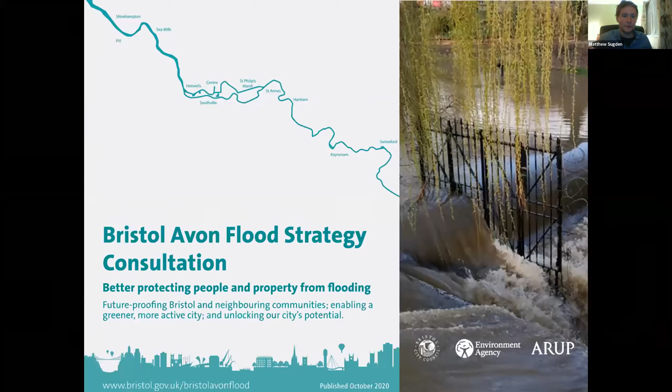Thank you. Thanks, Richard. Evening all. My name's Matt Sugden. I'm a flood risk engineer at Bristol City Council. I've been working on this for a number of years now, and the flood strategy is now out to consultation. So really big milestone for the project, and great to be here talking about it now. So 3 speakers, as Richard was just saying. I'm going to give a bit of an overview from Bristol City Council's perspective, and then Dan's going to give a bit more detail around the modelling that was done. And Hen will talk about some of the challenges and the preparation of the strategic outline case.

So let's start at the beginning. Why do we need a flood strategy in the first place? Well, the flood mechanisms in Bristol are fairly complex. It lies right at the bottom of a very large river catchment. The River Avon catchment kind of goes all the way up to the north to the Cotswolds and down in the south from the Mendips, and brings with it all of that flow from rainwater falling on South Glos, BANES, even parts of Wiltshire and Gloucestershire.

And it arrives slap bang in the middle of Bristol city centre and is met with the tide coming up the River Severn. So as I'm sure a lot of you are aware, the Severn Estuary has the second largest tidal range in the world, and that comes up the River Severn and into central Bristol via the River Avon and meets in the middle with the flows coming down from upstream.

So add to the mix as well, we've got a floating harbour in the middle of Bristol, an early 19th century water body that was constructed to facilitate a constant water body to mitigate the effects of the rising tide on the boats that were moored in central Bristol, and that just adds an extra layer of complexity.

So it's complex, but you know, flooding is not something that could happen. It does happen in Bristol. Most years, when we get particularly high spring tides, we expect to get minor tidal flooding in and around low spots of the Avon. In the last decade, we've had over 20 tidal floods that we have recorded, and perhaps somewhat concerningly, the highest was this year, in fact.

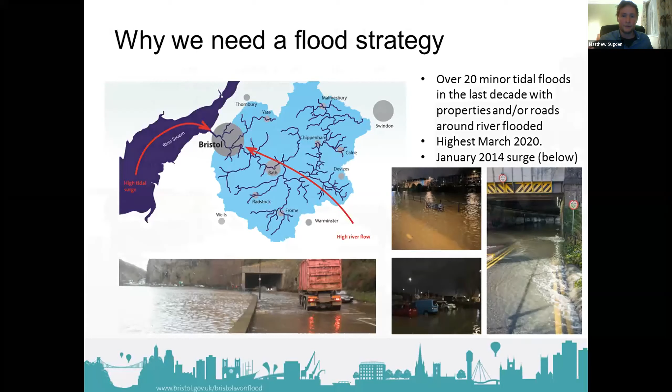So yeah, flood mechanisms are complex, and we haven't had a severe flood, but we could. But as well as that, we've got quite historic and piecemeal infrastructure. You can see there are low spots along the banks of the River Avon in the image on the right. We get regular overtopping in various locations,

but as well, our flood risk infrastructure that we do have is aging. So the floodgates on the left there are our principal flood defence gates that protect our floating harbour from the tide that comes up the River Avon. But you can see quite clearly that they're outflanked, and the kind of silvery objects that you can see on either side of the gate, they're the control mechanisms. So obviously the mechanisms themselves are quite vulnerable to rising sea levels.

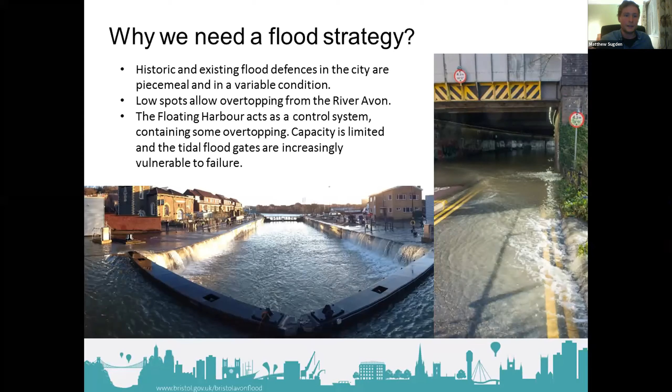So a few facts and figures. Well, in the current climate and with the flood defence infrastructure that we operate and maintain in the current day, around about 1,100 properties are at risk of flooding should we have a severe tidal event or severe fluvial event in the city centre, and a further 200 properties in communities upstream and downstream. And of course, sea level rise and climate change is doing nothing to make that any better.

And if we were not to take any action other than maintain what we've got already, then by the end of the century, we can expect to see about 4,500 existing properties at risk. And that last bullet point on the screen there is really quite striking to me. So a flood event that has a 0.5% probability of happening in any given year in the current climate could become as frequent as a 63% annual probability by the end of the century.

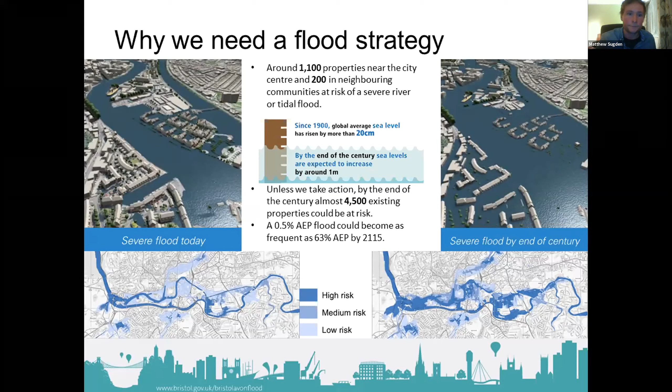So the kind of event that you see on the bottom left image there, where large areas of central Bristol would be flooded, that could be as common as a 63% annual probability event by the end of the century. So obviously a lot of strong evidence there to point us down the need for a flood strategy.

So a bit of background as to how we got to where we are now. This spans my entire career at the council. In fact, when I joined in 2009, we quickly went into a piece of work in 2010, scoping out a piece of work called the Central Area Flood Risk Assessment. And that was really the first time this sort of joint probability of fluvial flows coming down the system coinciding with tidal surges up the system and what impact that would have in central Bristol was assessed.

Some of you might be wondering, well, hang on, River Avon, main river, why is the Environment Agency not leading on this? And the Environment Agency are a really key partner, and they are a joint promoter of the scheme. You'll notice that the branding is on the consultation, and everything's been done in coordination with the agency as a scheme promoter, and they sit on our board. But for various reasons, it makes a lot of sense for Bristol to be leading, not least because of the impact on opportunity for the city in terms of development opportunities.

One of the strategy objectives when they were first set all the way back in 2015-16 was around supporting sustainable development in the city, and that's become even more important in the present day. Here we are in 2020.

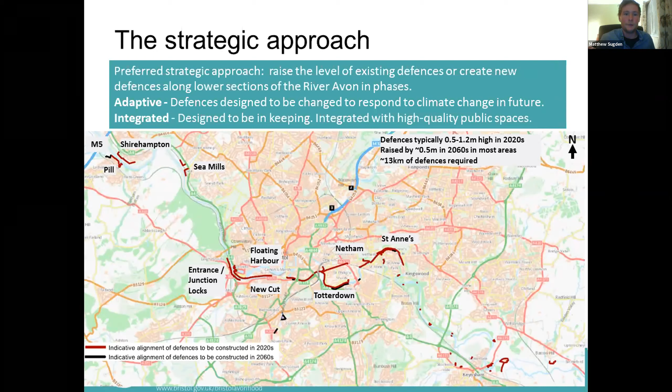So then, having arrived at this preferred strategic approach of raised defences, it was kind of like, well, what's our vision for what that looks like for Bristol? What does it mean for Bristol? And the vision there is really all about making sure that we design measures that work for Bristol year round. So we are at a strategic outline case stage at the moment. No designs have been developed. All of the illustrations you'll see in the consultation and the strategic case itself are concepts, not designs.

So it's not just flood resilience, it's flood resilience at the centre, incorporating opportunities for new green spaces and improved landscape. It's about improving biodiversity and opportunities for flora and fauna along the River Avon corridor. Movement is a really big one for us. Those that know Bristol will know it's a very hilly city. So having this east-west link through the city to provide a flat walking or cycling link to get to various places is a great thing for us.

And then it's also about making sure that we take the opportunity to enhance and protect our existing heritage and culture. Bristol's got a rich engineering history, and it's also got very sensitive areas. Underfall Yard, being the area where the predominant control mechanisms for our floating harbour are located, is a scheduled ancient monument, so there is no higher designation. So when we're designing new infrastructure around these places, obviously it needs to be very sensitive to the heritage and culture that we have in the city.

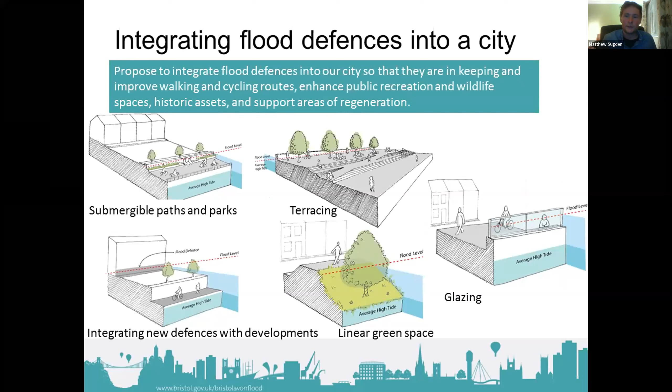So those illustrations brought to life again, the top left there, a lot of you might recognise that's Bath, the same river, different problem. So largely they have a conveyance problem, whereas our problem in central Bristol is more driven by the tide. But again, it's just showing an example of how flood defence infrastructure doesn't need to just provide that one function. It can incorporate landscape and biodiversity improvements. It can incorporate landscape walking links and parks, and just give people the opportunity 99 days out of 100 to be able to get down to the river and enjoy it, but still have that infrastructure in place that protects behind when you do need it.

And again, other side of the river on the bottom left in Bath, again, an example of how flood defence has been integrated into the fabric of a refurbished building. Terracing example is the South Bank in London. Obviously, I'm not suggesting that we're going to create a new South Bank for Bristol, but it's just an example of where this technique of terracing has been used to create a great destination. And then other examples there, across the Atlantic in the States, Delaware, I think that example's from, where they've just incorporated a linear green space along the corridor.

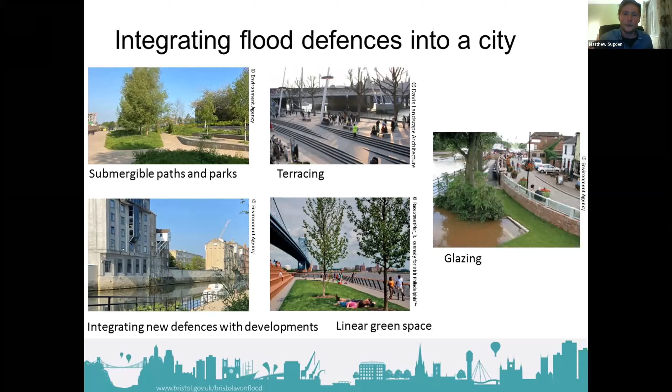And one other potential solution that I personally don't favour, but it is a feasible option for managing flood risk, is incorporating a low-level defence in the short term, and then doing it in such a way that you can adapt over time and incorporate glass panels or glazing if you need to at a future point in time. So I'm sure lots of people will be interested, and certainly in all of the engagement and stakeholder sessions that we've done so far, lots of people have been interested in the other options that we're not proposing as part of our strategic approach.

I won't go through an exhaustive list, but basically, a lot of you will be familiar with the flood and coastal erosion risk management appraisal process. But essentially what we did was identify flood defence techniques that would be feasible in terms of practically effective in terms of reducing flood risk to Bristol, identified them, and then combined all of those in logical sequences to create a long list of strategic approaches. That long list was 39 combinations of measures. That was then tested to reduce to a short list of 7, which was then assessed against various economic appraisal processes, as well as assessing against our strategic objectives to arrive at the strategic approach that I've just outlined. But 2 things I'll just mention: tidal barrier and slowing the flow upstream.

So real big interest at the moment around natural flood management, I've found, just by talking to people in the city, and from reading the national media. It seems to be getting a lot more coverage at the moment. But of course, in terms of the tidal problem to central Bristol, land management practices and storing floodwater upstream is not going to do anything to manage that tidal flood risk.

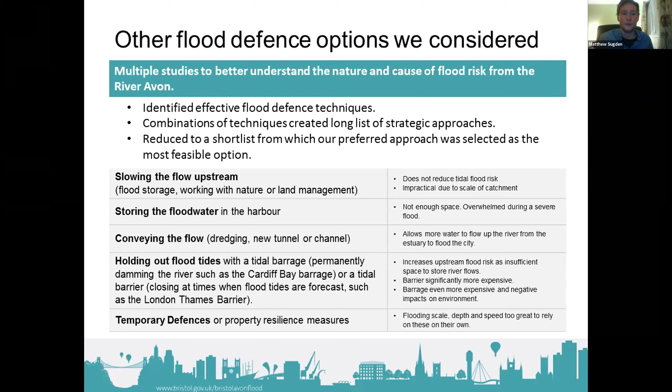So what happens is you can raise the tidal barrier to keep the tide out, and that's fine. But what happens for the period of the barrier being raised is you get so much water coming down the system that it actually fills the channel up and overtops, and you end up in a situation where you have to have raised defences along the banks of the river in combination with the barrier anyway. So it just doesn't quite work for Bristol.

Next steps then, and this is the last slide, it's just to say really that these proposals are at a very early stage. We've developed this strategy in the form of a strategic outline case. We've submitted that strategic outline case now to the Environment Agency in their role as regulator of the DEFRA Flood Defence Grant in Aid pot. And we're going through that technical assurance process in parallel to the consultation that is live right now.

But that, we hope, will get us to a point in time where the council's administration can make a decision on adopting this preferred approach that we have, and then quickly move into outline business case phase early next year in 2021, come summertime, and that will work through probably in a couple of business cases going together in parallel, and to be informed by further public engagement. Obviously we'll have to then get into detailed design work, gather our various consents, and hopefully get us to a point in time where the first phase of construction might begin on the ground around about 2025.

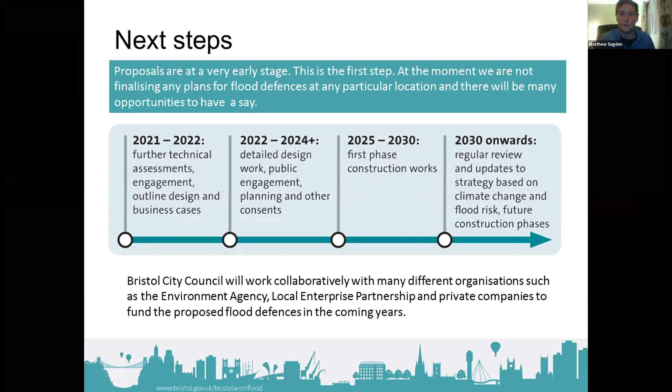All being well, this could be delivered by the end of this decade, but of course it doesn't stop there. It'll be regular reviews, examining what we've done, applying our emerging knowledge around climate change and all the rest of it to inform certain trigger points as we move forward into the latter part of the century.

So thanks ever so much for listening. Like I said, the consultation is out now. I really do encourage you to put in your response either as an individual or as representing an organisation. This is the first chance, I suppose, we've really had to put this out to technical specialists. We're getting a lot of interest from stakeholder groups and residents and businesses, but we'd really value your technical expertise in terms of criticising the work that's gone into this to get to a point where we've been able to put this out to consultation.

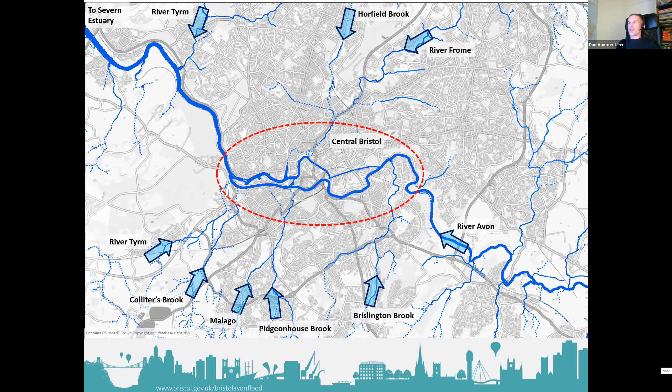So if we zoom in a little bit more, you'll see that not only do we have the River Avon, but we also have the floating harbour. The floating harbour is effectively a water control system. This was the original course of the Avon, and about 200 years ago, the floating harbour was constructed to provide safe mooring for trade vessels. Today, it's mainly used for recreation and navigation.

So the floating harbour is effectively sealed off from the tide, and the Avon was diverted along what is known as the New Cut to the south of the harbour, and that remains tidal. So during normal flow conditions, the water level in the floating harbour is maintained at a fairly constant level, and this can be regulated using the Underfall Yard sluices. They can discharge excess flows from the harbour when necessary during low tide.

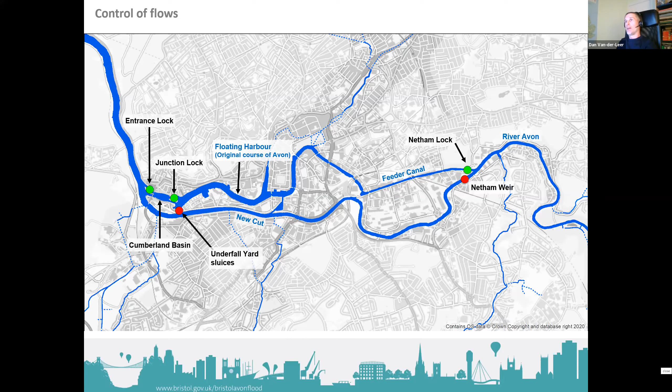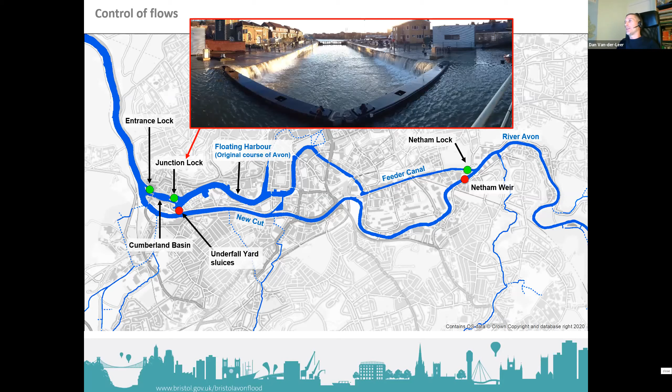So the system operates by Netham Weir maintaining a sufficiently high water level to enable navigation from the upstream reaches of the river into the floating harbour via the feeder canal. During flood conditions, the lock gates at either end of the system can be closed to effectively try to seal off the floating harbour system from the impacts of flooding. However, as we've seen earlier this year in March, the lock gates and the area around them isn't high enough to prevent those very high tide levels from getting into the floating harbour and causing flood risk.

So why do we need a model? Well, we can look back at past flood events and learn from them, but they can't give us all the answers. They can't tell us what might happen in the future. Models are needed to understand flooding mechanisms, flood depths, and also to be able to provide the evidence to justify any actions that we take to manage the flood risk, such as which options we select, how big do they need to be built, and where.

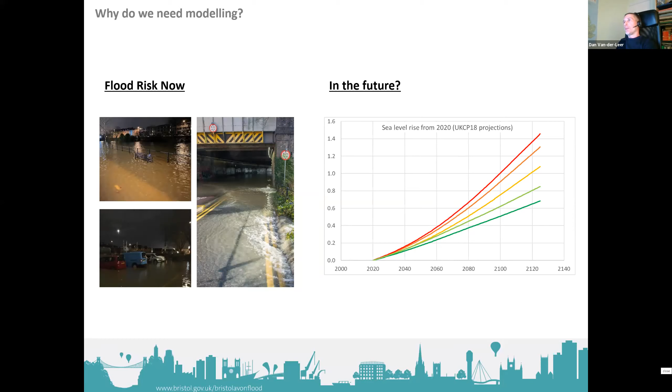So we've established the need for a model. So a model can be thought of as a virtual representation of a system. In this case, it's the river system. So for the strategy, the model has been constructed all the way from the Severn Estuary, from Avonmouth, all the way into Bristol. So that's the representation of the influence of the tide all the way into Bristol. And it also extends upstream past Keynsham. And this is to be able to represent those areas at flood risk from very high river flows.

The river channels within the model are represented using cross sections, and the data for these cross sections comes from topographic survey. For the areas upstream and downstream of Bristol, those cross sections have been extended across the floodplain to represent the floodplain. However, within Bristol itself, a more accurate approach has been taken, which is to use a 2D floodplain model, which I will talk about in a minute. So the 2D floodplain model is dynamically linked to the river system so that the interaction is represented.

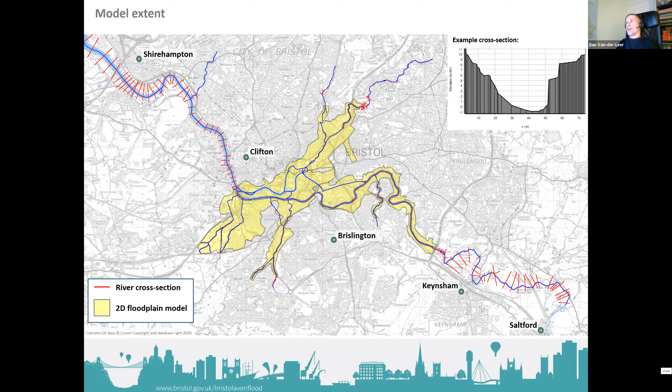So the river model not only includes the open channels, but also all the culverts associated with the river system. For example, the stormwater interceptor sewer, which runs to the north of Bristol city centre, is included, and that can take excess flows from the River Frome system and discharge them into the Avon downstream of Bristol.

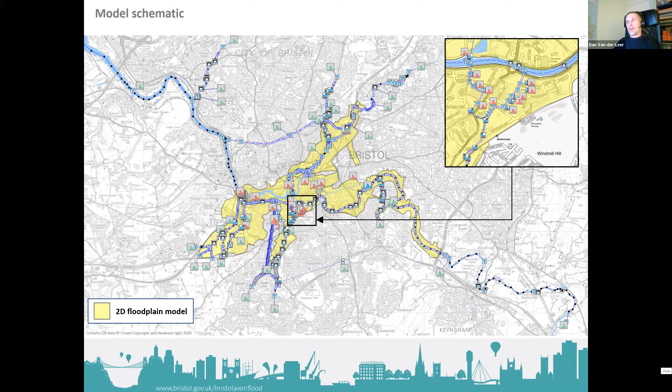In addition to the LiDAR data, the model also includes bathymetric data for the floating harbour and additional layers to improve the accuracy of the model, including the riverbanks, which are all based on topographic survey data. So that's the geometry of the model.

What we also need is to know how much water is coming into the model. The river system hydrological analysis has been undertaken based on gauge data, and this considers the whole catchment that drains into the Avon. For the Bristol strategy model, there's 30 individual inflows representing that within the model. Not only are the peak inflows calculated, but we also use real-world gauge data of past flood events to come up with a representative hydrograph shape for the biggest inflows coming into the model.

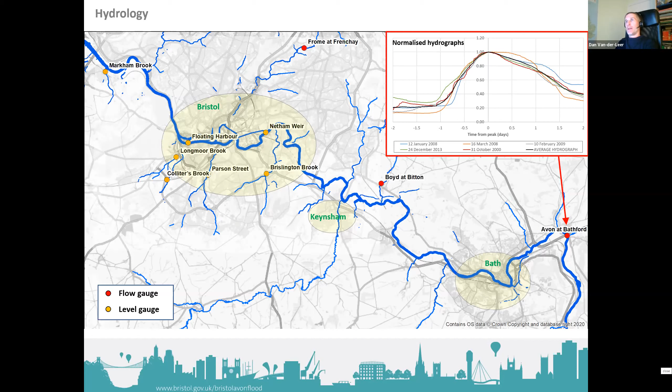So a model is all very well and good, but we need to have some confidence in it before we can use it in earnest to make decisions. For the Bristol Avon strategy, the model has undergone a calibration and validation exercise, and this is where we put real-world flood events through the model based on things like rain gauge data, and then we compare the model's predictions against the observations, including gauged water levels from river gauges, as well as flood outlines.

And this has been done for a range of tidal floods and fluvial floods. And the results have demonstrated that by calibrating the model and validating it, we have an acceptable level of accuracy that can be used in the strategy. So once we have a calibrated model, we can start using it.

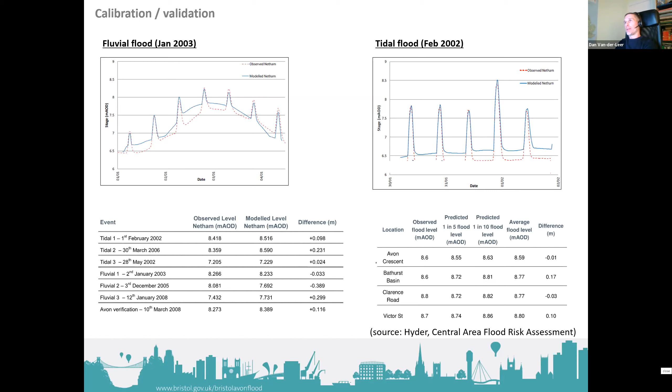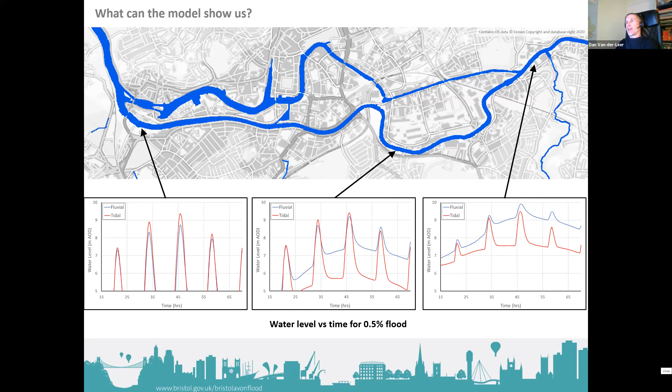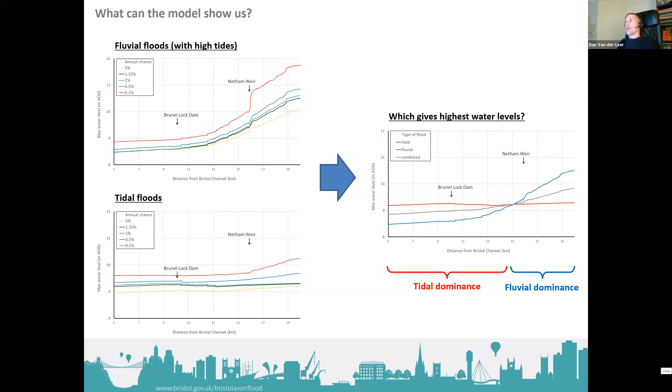So the graph on the right is demonstrating there's a kind of switch point between tidal and fluvial around Netham Weir or just before it. So as well as looking at results in the river, we can also look to see what's happening on the floodplain when the river overtops.

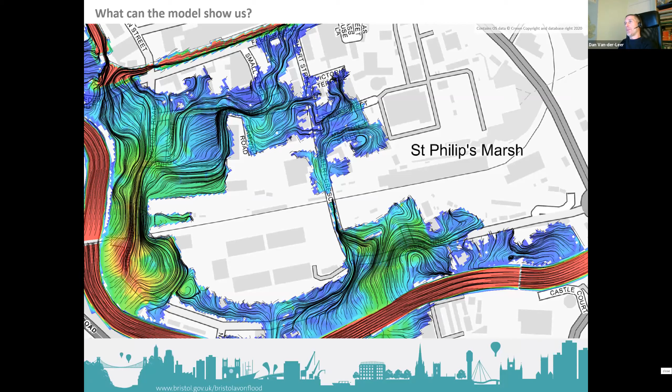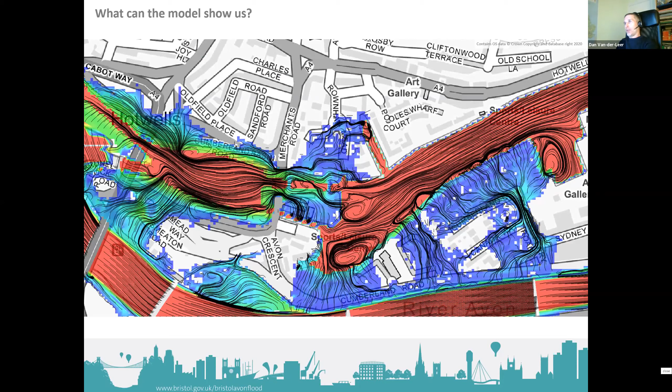And lastly, I'm just going to end on a slide showing one of the applications of modelling within the strategy. So as Matthew has already mentioned, the preferred option is for raised flood defences along the River Avon. There's obviously been a lot of modelling work to get to that point. However, there's still a little bit of modelling work we had to do.

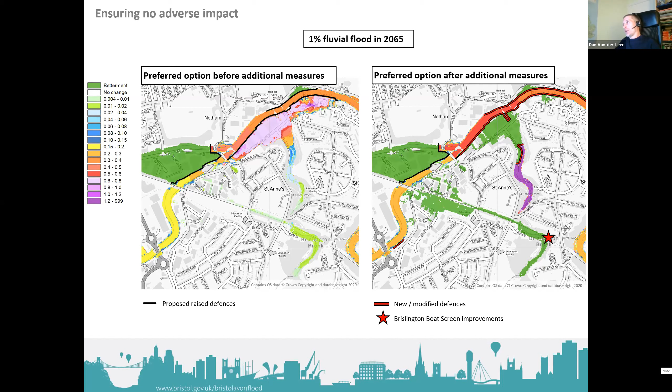Right, so I'll just share my screen. One second. I suggest if you're all stiff and need a bit of a stretch, it's a good moment while I do the swap over. Okay, hopefully sharing the screen, and now we're into the slideshow. So I'm hoping everyone can see the screens.

Thanks, Dan. I'm going to talk a bit more about some of the work that went into the Bristol Avon flood strategy. We, Arup, were brought on board to update the document and bring together all that wealth of knowledge developed by many partner organisations along the way, to update the modelling as Dan's taken you through, and to enable the integration of the flood defences with the strategic objectives. And I'm going to go into that a bit more, and evaluate the costs and benefits of different flood protection levels and standards of protection. And we also included an EIA pre-scoping report.

A key lesson learned along the way for producing this document is that the Environment Agency's approach needs adapting to allow for the complexities and the nuances of a complex city like Bristol and the surrounding region. And it's been a real aspiration of our collective team, consisting of Bristol City Council, the EA and ourselves, to try and work through the grey areas and enable them to be both understood and allowed for within the strategy. And the involvement of BCC and their stakeholders has been a really key part of that process.

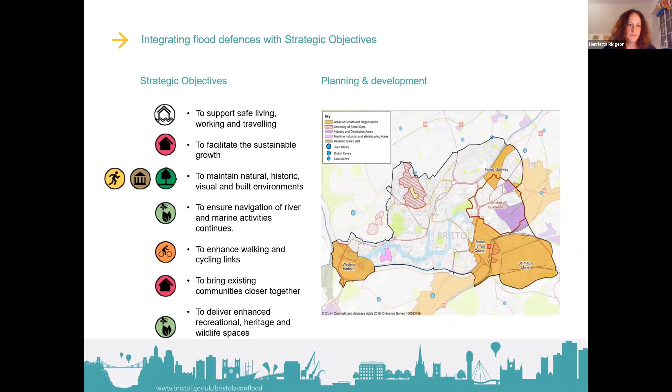I'm not going to go into this in a lot of detail, but just basically to say that integration means it's not just a wall, it can take many different forms. Matt went into some really good practical examples, but our preference will always be to develop designs and combine them with landscape features so that they deliver multiple benefits and are sympathetic. And decisions will have to weigh which aspects and components of the design are most important to each area of the city.

So to go into a bit of detail, this is a map of the central area of Bristol. And if I start off with the Western Harbour, just to go a bit more into the character areas. So the Western Harbour is characterised by the presence of the large industrial infrastructure and buildings. It's where the New Cut and the Floating Harbour come together. Historically, it's an incredibly important conservation area and links to favourite engineers of mine, William Jessop and Isambard Kingdom Brunel. And it's a real iconic gateway to Bristol with privileged views of the Clifton Suspension Bridge.

And then moving east, you've got the Western Corridor, which goes all the way from Cumberland Road up to Temple Meads Station. It's very linear in nature. It's urban development, which is very close to the River Avon. There's a few brownfield sites left being developed, 2 major road crossings from the city centre to Bedminster and Totterdown. It's got some really good iconic wrought iron pedestrian bridges, and the north-south links are as important as the east-west links.

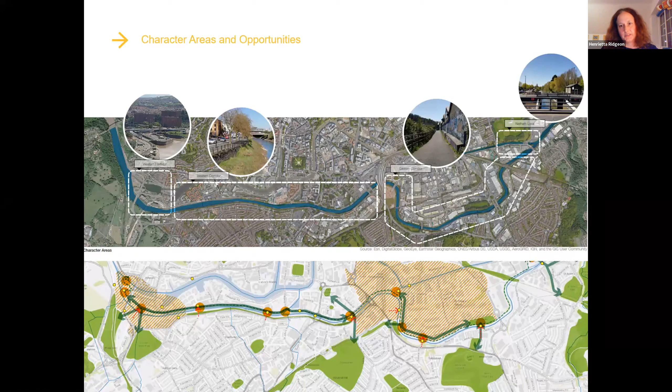And the way you go about planning this is very important. So it could be possible to establish a sequence or a phasing of events to try and incorporate some of the flood defences in what's going to go on in the future. So I'll just go into a bit... these are not set in stone. These are just some ideas of some of the ways you could incorporate different ways of doing flood defences.

And here's one example. So here the images show a connected and open place in line with what happens in the M Shed on the other side, but with two corridors defined by different surfacing materials and occasional seating. And the presence of the railway creates such a unique opportunity to explore the history of the harbour and be a tourist attraction. But because of the linear nature of the works and trying to keep open the railway, habitat creation and the introduction of vegetation is limited. So we've looked at, you could consider doing raised beds within the flood defence walls, and that would help to reduce the scale of the wall.

But this area naturally lends itself to the creation of a significant green corridor, and the placemaking and the destination could be greatly improved by the introduction, for example, of a continuous tree-lined footpath along the southern edge of the Cumberland. And all of this would allow people to get close to the river edge, even during flood events, and it would scale down the presence of roads and introduce a continuous line of greenery, really, to create a significant habitat and recreational corridor. And it's quite a limited opportunity for us to try and introduce something like this right into the city centre.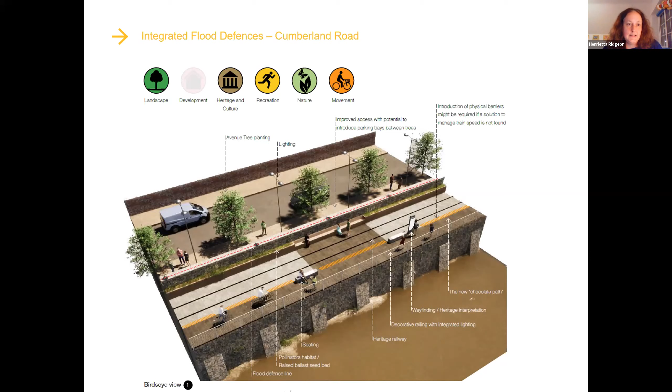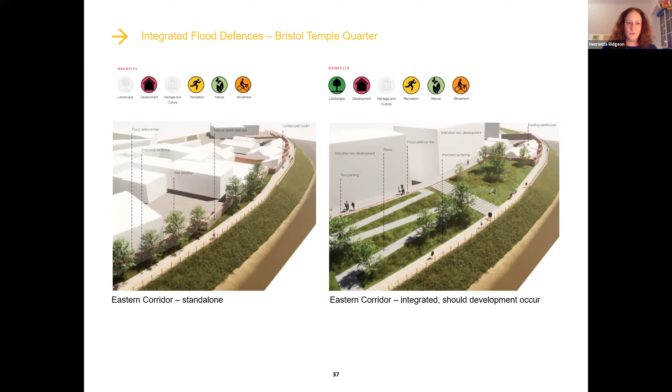There are so many things and ways that we could embrace these flood defences. We could look at trying to raise awareness around climate change by having markers of flood levels. We could look at ways that we try and connect up green areas of the city. And it's a really exciting opportunity. And the point of the strategy is not to dictate what we're doing now, but it's to set an envelope which will enable us to progress through coming up with what suits the city.

What we also found was we tested the low public realm costs versus having quite high quality finishes and high public realm costs. And throughout the works, along the whole length of it, if you were to say, right, we're going to do high public realm works, it's an order of magnitude of 20 million, which sounds like a phenomenal amount. But when you consider the magnitude of what you're already investing, a little bit more gives you a much higher quality finish.

We've also assessed 2 levels of different climate change allowances, which are based on the flood and coastal erosion risk management and the national planning policy framework. And the planning policy framework climate change protection requirements are more onerous, resulting in an increase in flood defence height. But that's what new developments need to build to ensure their properties are safe, effectively. Well, not safe, the risk is reduced, to be pedantic. But in reality, there's no set defence level that we're instructed we have to build to. So the height that we set these to can be led by our local choices to help us as a city have more value for money.

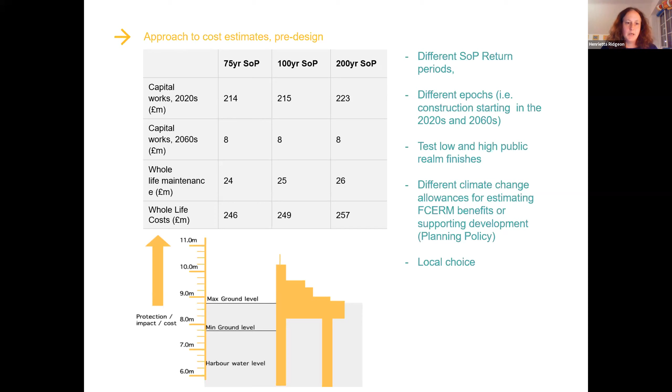I would say the level of effort we've gone into understanding these nuances of height changes in the defences is not necessarily normal at the strategic case, but it's really helpful for Bristol and the public to understand what the effect of those choices are and what the benefits might be. So this slide, I just want to use it to summarise some of the key data we've got. So we're planning to construct defences in 2 phases, in the 2020s and 2060s.

Well, we're anticipating that the phase 1 could be split into 2 build stages, and each build stage could have their own separate outline business case, detailed design and construction approach. And the local choice is a strategy that addresses the planning policy requirements, and it's one that we think is worth it. And in the table, you can see that the build 1, which concentrates on getting the gates installed at Entrance Lock and Netham Lock and some of the early works around to make sure that there's no adverse effects, happens early on, but the grant in aid funding is very much reliant on the whole project being installed, including the phase 2 works.

So our aim is to try and time and program the works in a way to ensure that there's no adverse impacts at any point, and to try and increase the opportunities for integration with strategic objectives. For example, maybe leaving the works down at the Eastern Corridor to the latter part of the programme to try and enable some of those developments and plans that might be being considered down there be incorporated into the defences.

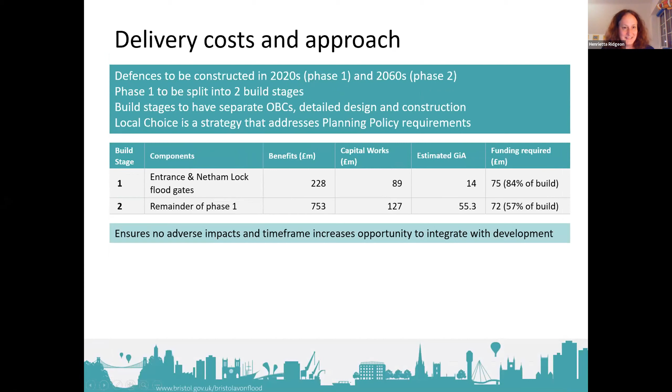I'm going to jump this slide because I've already talked through it. So just to finish off, a little bit on the environmental assessment. We've already been speaking to relevant authorities and communities, and there is an internal steering group that has been supporting us. And so far, we've had a voluntary strategic environment assessment, a WFD assessment, an environmental impact assessment pre-scoping report. And that's really identified some key environmental issues, such as terrestrial ecology, estuarine ecology, landscape, archaeology and heritage, land quality and land use, traffic and transport. And we will really look to incorporate and take those environmental issues into account as we proceed with the project.

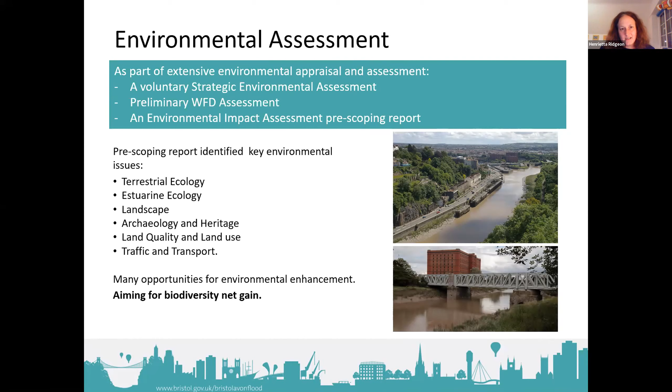So just to finish off with a few lessons learned. First of all, I've really enjoyed the collaborative effort between the EA, ARUP and BCC. We're all local people and our knowledge and experience of the area has really helped to bring to life both the problem and to develop a strategic way forward. But to summarise some key lessons learned from my perspective, one is that you need to prepare different levels of material to brief different people. We have some very highly technical people interested in the project, and then some people who come from areas where they're not technical. You need to prepare much simpler, clearer English and just keep it simple.

And then I found that the EA prescriptive approach doesn't really tie up with the Bristol City Council approach, but trying to create the same amount of information and background and body of evidence, but enable both of those processes to go forward, actually has to be planned in terms of your messaging.

The third point is very much about understanding what you're trying to build where, because the nuances of the different areas, the past, the present, the future, all the way along the route of the flood defences need to be clearly articulated and understood. And in cities, I think where flood defences have to be incorporated, the benefits of unlocking those potential brownfield sites through flood defences can really significantly contribute to the strategic case. And then the last bit is, if you can try and incorporate flexibilities into your solution and into your approach to flood defence, that can really help the cities set visions and to enable them to integrate it with the city's policies.

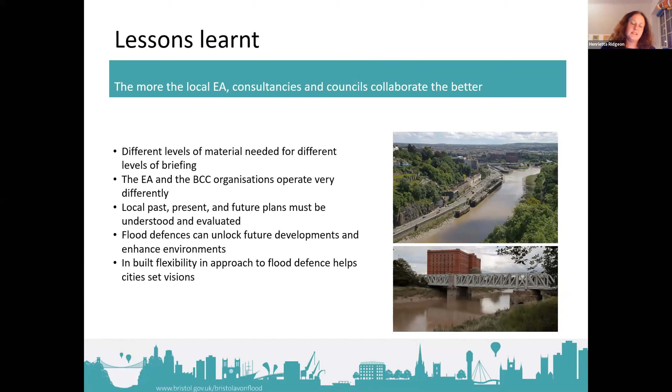So I've come to the end of the talk.